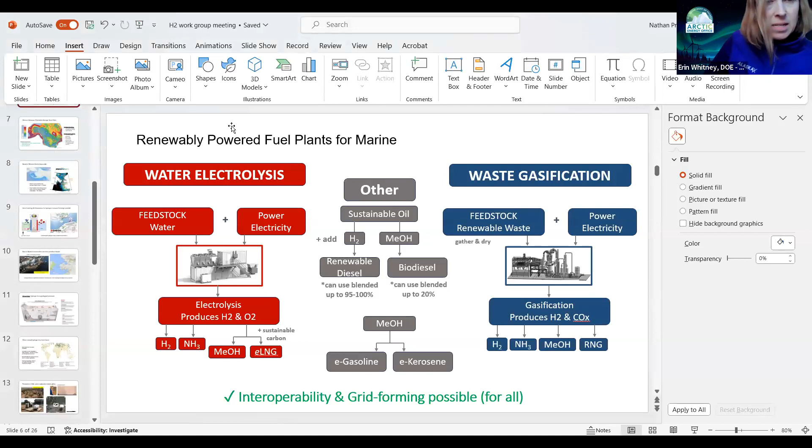Okay. Well, then I think we will jump into our featured speaker for today, which is Dr. Nathan Prisco from the Alaska Center for Energy and Power at the University of Alaska Fairbanks. Nathan joined ACEP relatively recently and is a hydrogen specialist, among other things. So his talk today will be focusing on blue and green marine fuel pathways. I think there's probably a few more details encompassed in that title, but Nathan, I'm going to let you take it away and elaborate on your topic from there.

And I am seeing your presenter view. So far, so good. And yep, that looks perfect. Yeah. So thank you for the opportunity to speak today.

It was a bit of a stand-in, so I think that I did include those things that you mentioned, but also a little bit broader in the update. So really today, highlighting use of hydrogen for grid support. This is something Justin referred to, how hydrogen can support greater amounts of renewable installations, some pathways for renewable fuels in Alaska, also potential for using the infrastructure we have in hydrogen.

And I wanted to give just a quick overview of geologic or natural hydrogen, because there's a lot of discussions in the state and projects on carbon storage as well as geothermal. So really highlighting the subterranean opportunities for hydrogen, with an update on Mighty Pipeline, which is a company I formed before joining the university.

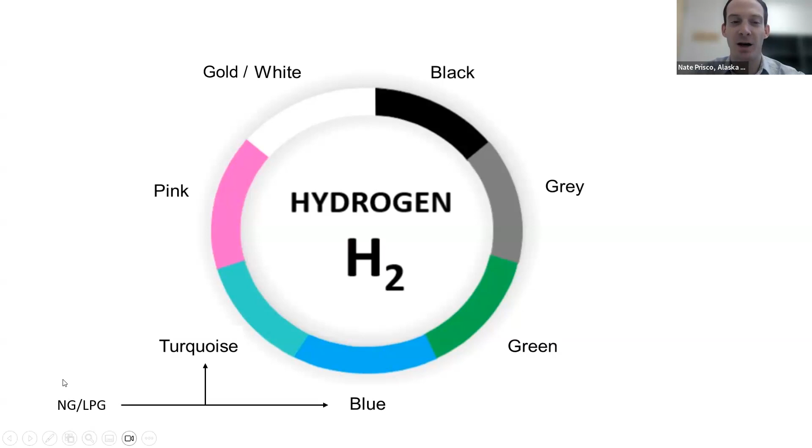One project with ACEP that we've started to look at is really the community value of electrolyzers, particularly in providing grid support. This is something that batteries are quite often used for, but really the challenge is that as conventional power plants are decommissioned, there's very little ability to balance power fluctuations. So there's a lot of interest now in actually using these types of electrolyzer systems for grid support.

And you can really think of this as another form of storage, but also really complementary and an extra layer of protection to batteries. So what makes this grid forming is combining the pieces of an electrolyzer, a fuel cell, a storage tank, and the electronics for providing that grid support. And just to look at the storage capacity, even at a community scale project, a 600 kilogram hydrogen tank is about $400,000 and stores 20 megawatt hours thermal or 8 to 12 electric.

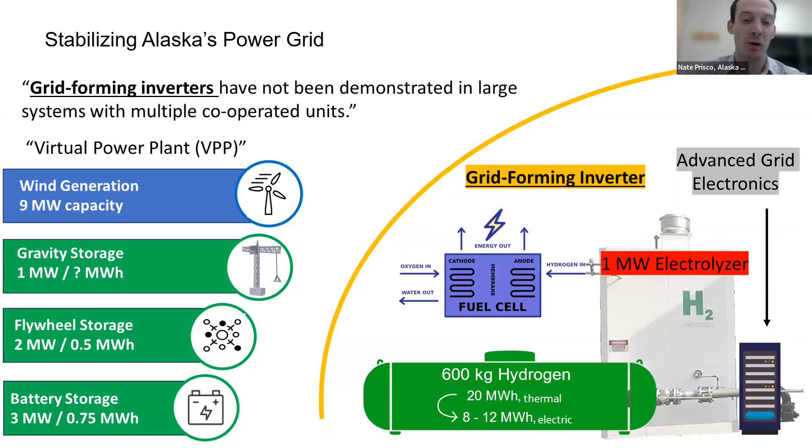So really there's been a lot of DOE FOAs on how can we combine things like electrolyzers, e-fuel plants, or other industrial loads with the grid in smart and sophisticated ways to be able to support more renewable installation.

Really, for opportunities in Alaska for hydrogen, one thing that really comes up a lot is the options for the marine fuel space. This is something driven by regulation that Alaska's cruise ship industry, as well as fish processors and other marine industry, is really trying to figure out: how to source or produce the fuels that they're going to need in Alaska, and just really to try to organize some of the options we have.

We can really get there with renewable power and water to energy, or renewable power and waste to energy. Both of these have been modularized, so it often makes sense to go where the resources are rather than try to develop in existing places. But essentially through electrolysis, you have options to make hydrogen, ammonia, methanol, or even resources like LNG.

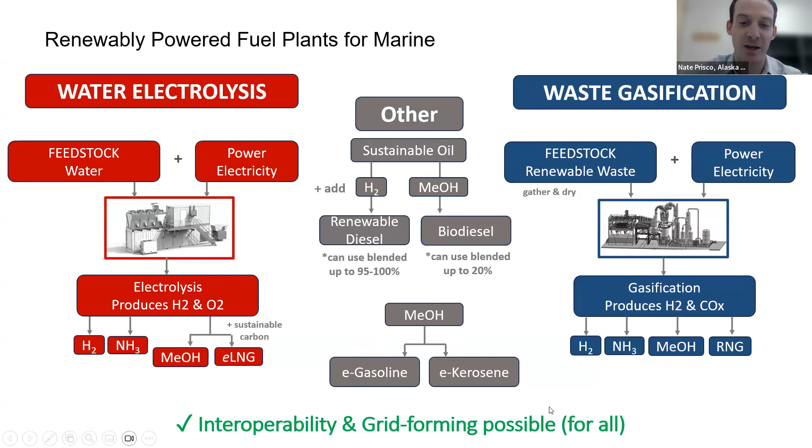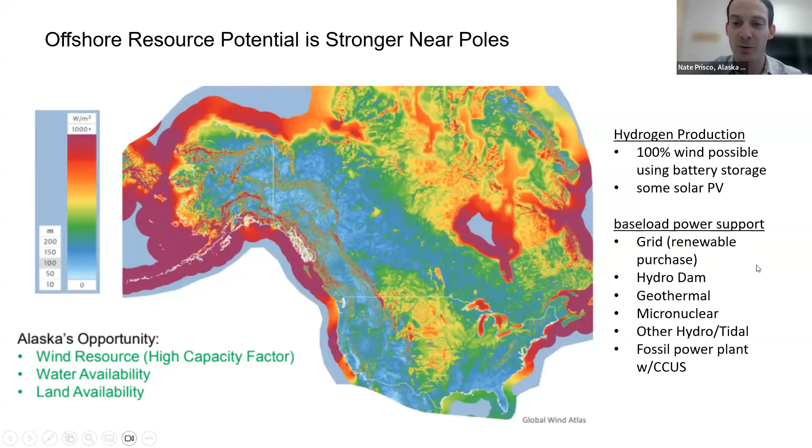And I think a big opportunity for these types of projects is that they can provide grid support, similar in ways to power plants. We've had previous presentations on wind resource potential, but again, just to highlight, Alaska has a very strong wind resource, and offshore resources, including wind, are generally stronger near the poles. So there's definitely wind resource available, there's water availability, land availability, and really the challenge for projects is, of course you can rely exclusively on wind, but what are other ways you can help provide consistency to the electrolyzer?

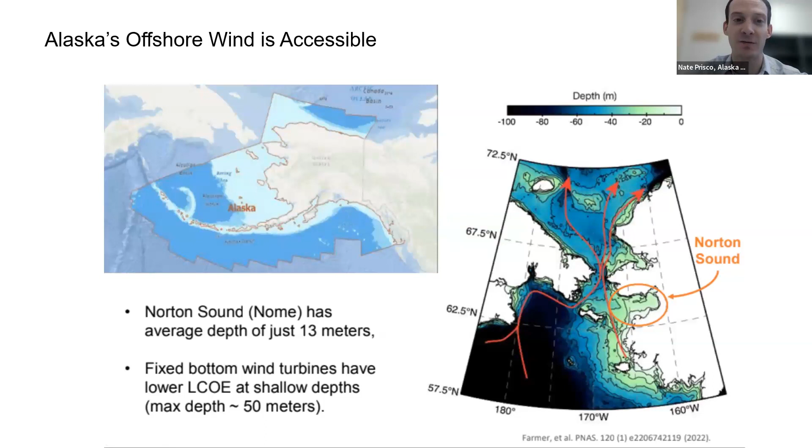Also, in terms of offshore, Alaska's offshore resource is very accessible. Many states, including Texas, are starting to look at offshore leases. And just to really highlight that, part of the reason why Alaska has such a strong potential is this shallow continental shelf, which can be a big cost influence on wind projects.

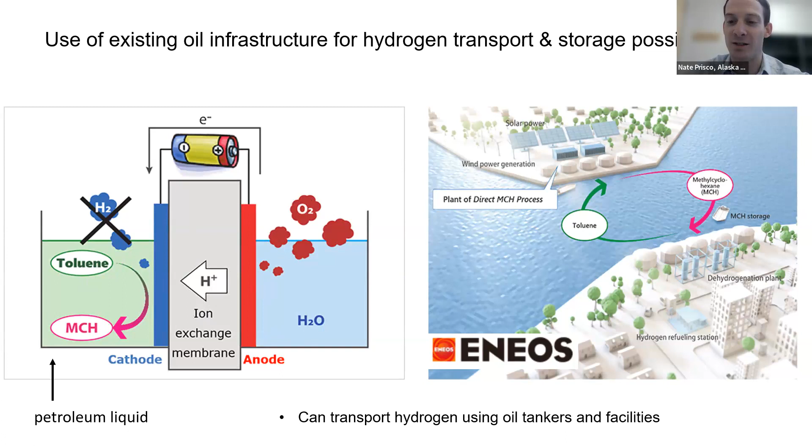One technology that I became aware of recently that I found interesting is ENEOS. So ENEOS is Japan's largest oil refiner, and they're developing projects in Australia and Texas using an electrolysis technology called direct MCH. So in their electrolyzer, they're using MCH, which is essentially a petroleum liquid, and they're able to produce renewable hydrogen and absorb it into this liquid, and this allows them to transport the hydrogen using their existing oil tankers, as well as storing it in existing oil tanks.

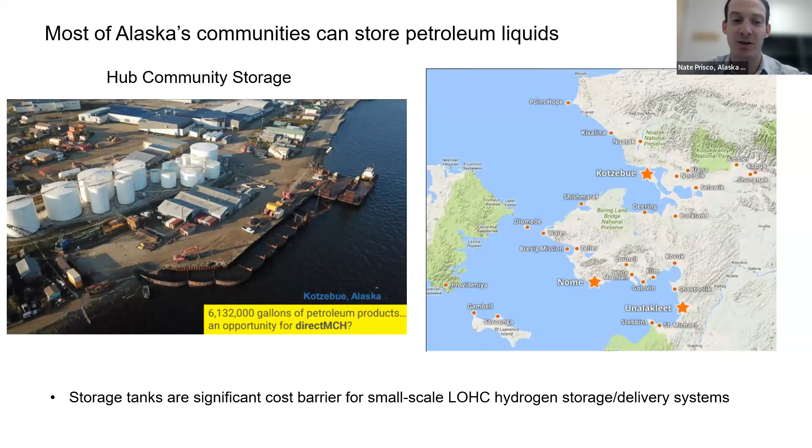And so really one thought that comes to mind is thinking about the challenge of hydrogen distribution in Alaska. We know that many of Alaska's communities have this infrastructure for storing petroleum liquids. So even from pilot scale projects, and thinking about how we can distribute renewable fuels through Alaska from hub communities to other locations, being able to use this existing infrastructure is a really strong value there. And really one of the major barriers to these types of storage and delivery systems is the tanks that you need for these materials.

I also wanted to, on a different note, go back to the subterranean. I haven't heard a lot of talk in Alaska about natural hydrogen, but hydrogen is produced underground in geological processes in a number of ways. So it really depends on what those geologic features are. It can be splitting of water by rocks that have radioactive minerals, or iron-rich rocks. And this hydrogen generally evolves to the surface, but in some cases can be trapped in reservoirs underground.

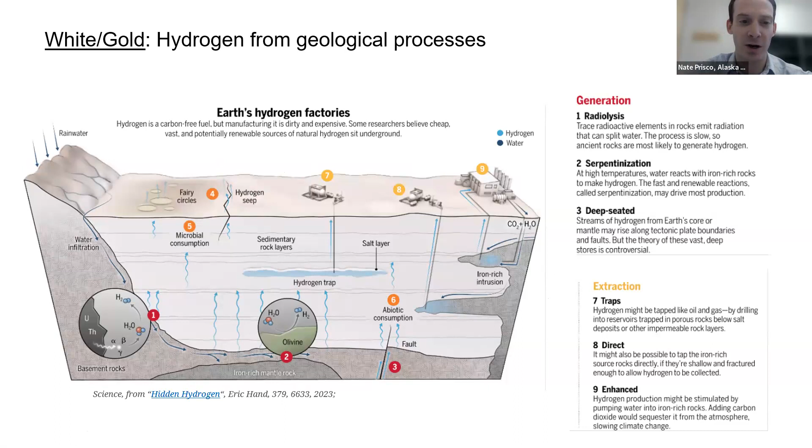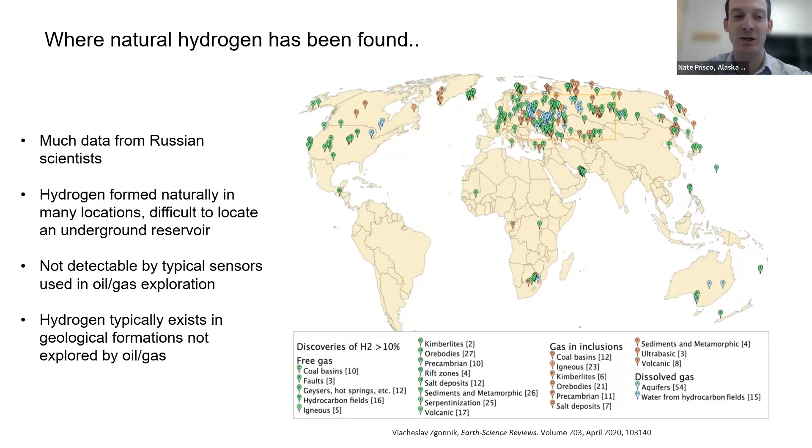And so part of why this is a frontier effort is that it involves exploring geological formations that typically haven't been explored by oil and gas. And just as a notable example, in Mali, there was a company that was drilling a water well. They struck hydrogen, and there's a community that has been powered on hydrogen, carbon-free, there. And there's active exploration efforts throughout the world at this point.

And what's interesting is oftentimes you can see evidence of hydrogen seeps at the surface with what's called fairy circles. So this hydrogen seeping to the surface can change plant growth. It can cause depressions or mounds to form. And often, if you go on Google Earth, you can see them in Namibia, you can see them in North Carolina and other places.

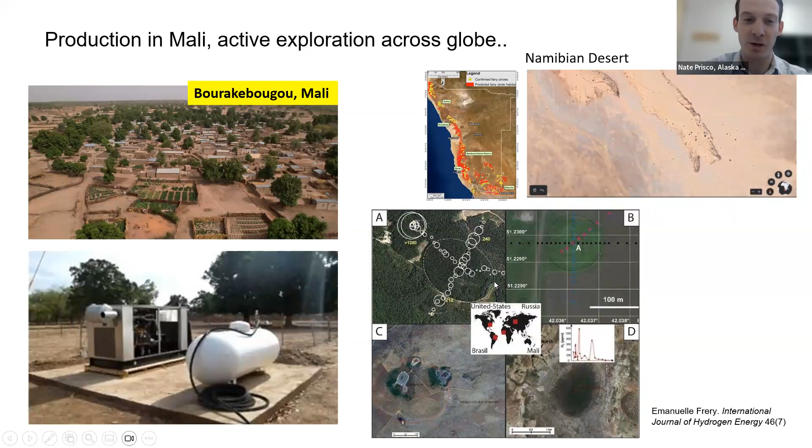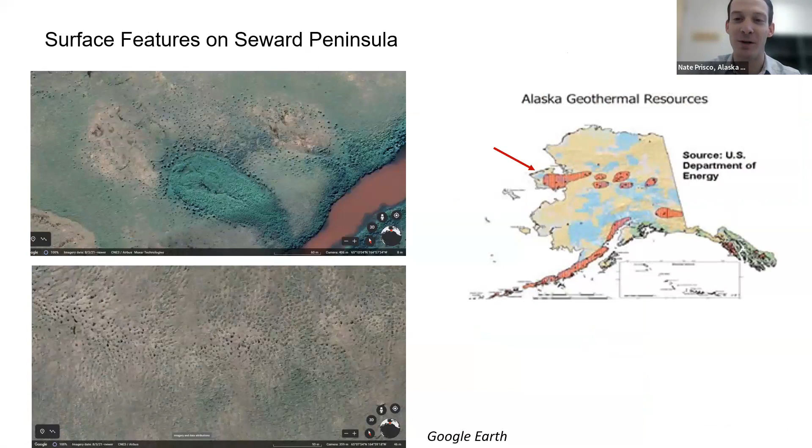And then I would just want to point out, ACEP is working on geothermal projects at Pilgrim. And one thing to point out is that there at least seem to be similar types of surface features there. And while I don't have a natural hydrogen company, if I did, I'd look at Seward Peninsula.

And to end the talk, I wanted to give an overview of Mighty Pipeline, which is a hydrogen transport and distribution company that really brought me to Alaska, and I have continued to work on it as I can. But really the goal of Mighty Pipeline is to be able to distribute hydrogen through existing oil and gas infrastructure, really addressing the problem that hydrogen is something that many people are trying to produce. But one of the major barriers is how do we transport and store hydrogen?

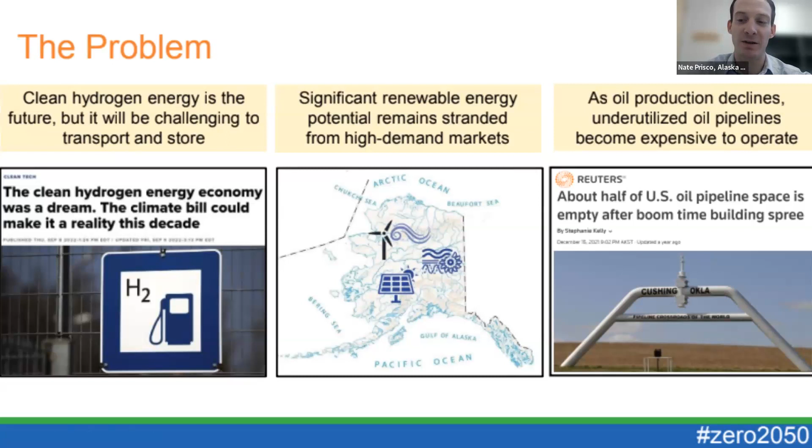Also, looking at the opportunities in Alaska, we see that we have very large amounts of renewable potential, but oftentimes lack that transmission interconnect to bring them to markets. And also recognizing the challenge that as oil production is declining, pipelines become expensive to operate. So the approach with Mighty Pipeline is developing hardware and process technology to transport hydrogen in the form of ammonia through oil pipelines for bulk delivery to market.

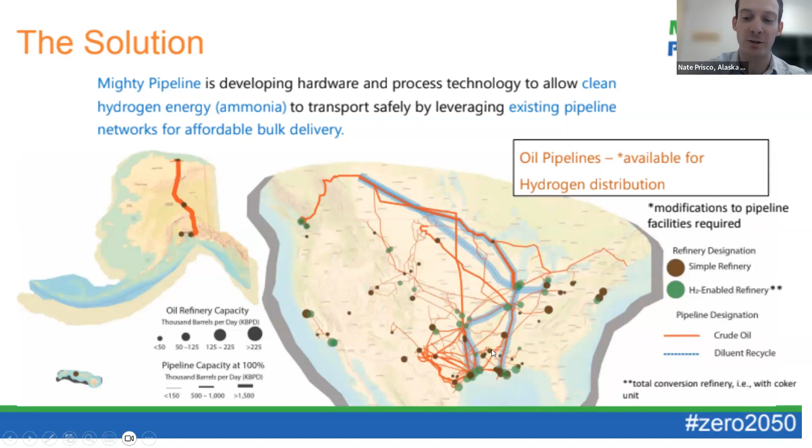Looking at the U.S. pipeline network, Alaska has the second largest oil pipeline in the world. And I've highlighted refineries in the United States to be either brown, as simple refineries, which are only capable of distillation, or H2 enabled refineries. These are complex refineries that have units like delayed cokers and other equipment. And essentially, this is where the vast majority of hydrogen is produced and used in the United States today. So there are definitely advantages to being able to distribute hydrogen to these locations, especially in the Gulf, where there are already hydrogen pipelines that can distribute that.

So really, the focus is on the midstream piece, because there's going to be substantial amounts of investment needed, and oftentimes midstream isn't a big focus. And in many cases, ammonia can be the most economical carrier whenever you have long distances of transport, as well as long storage times. So really, the problem that we solved is that Mighty Solution is a patent pending process technology to blend ammonia and oil stably so that it can be transported through pipes. And this enhances pipeline ROI and throughput.

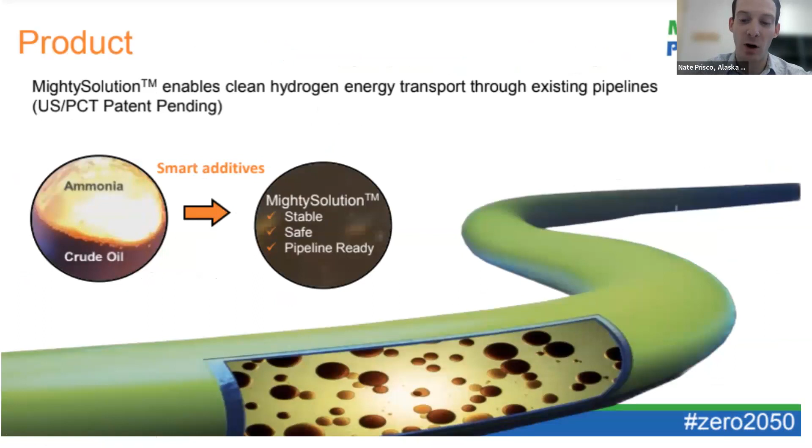So really the opportunity, looking at the benefits of ammonia blending into oil pipelines and what this can do, is that a lot of more viscous crude oils are very difficult to transport. In fact, very environmentally intensive to transport. So in the case of Canada, their oil cannot actually go through pipelines by itself. So they import oil from the United States to blend with their oil to send back to us so that we can reprocess it in refineries and send it back to them.

So this adds a lot of cost to their industry, and being able to produce a renewable or carbon-free alternative to that can reduce that $10 per barrel diluent recycle, but also in terms of those pipelines, essentially 70% of the pipeline is what they're trying to transport, and 30% is the diluent they're using to be able to move that.

So Alaska has not had a sort of strategy like this in the past, because there is no diluent market in Alaska, but using clean ammonia as a diluent could certainly help with the resources in our state. And also in terms of bio opportunities, one of the hardest parts of bioenergy is gathering. So being able to use pipelines and transport difficult to move bioresources is a major benefit.

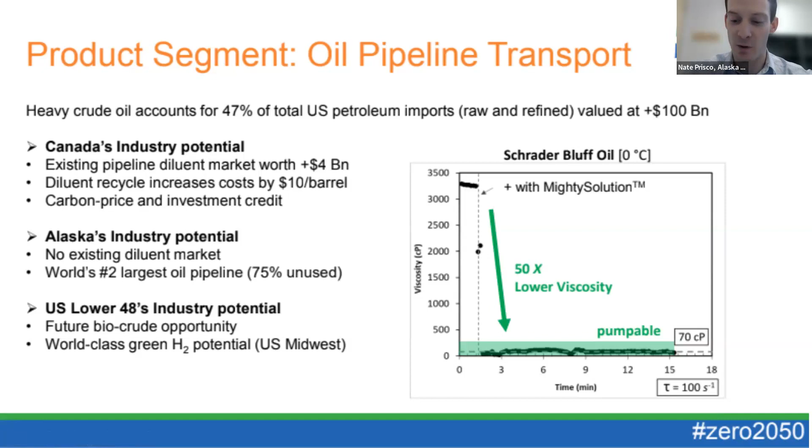So essentially what this does is that we can substantially reduce viscosity and transport any oil through a pipeline, whether or not that pipeline was designed for light oils or other resources. So really as an overview, this allows for transport of oil and ammonia. They can be separated at the terminal using just gravity, so very low carbon intensity. There's benefits in terms of what this can do in terms of oil processing.

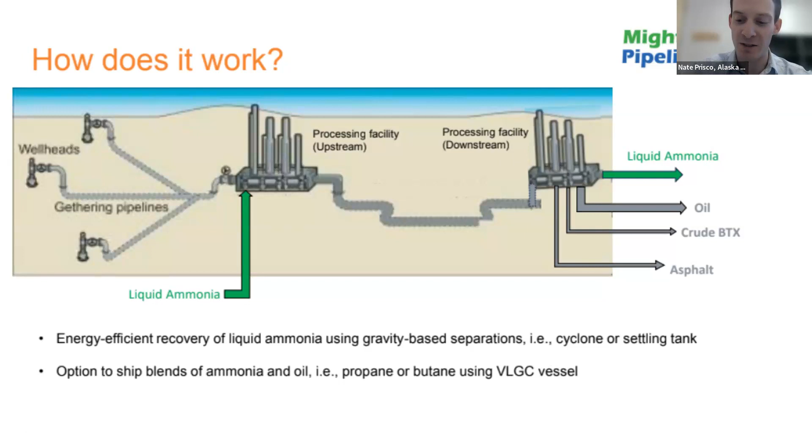So essentially, you can upgrade crude oil value and get things that can be used like INEOS does. So BTX can be used as hydrogen transporters. You can remove things like asphalt. And really, there's companies in Japan that are also interested in shipping blends of ammonia, because ammonia weighs about the same as propane and butane. So using these existing gas carriers, you can transport blends of ammonia and fuels.

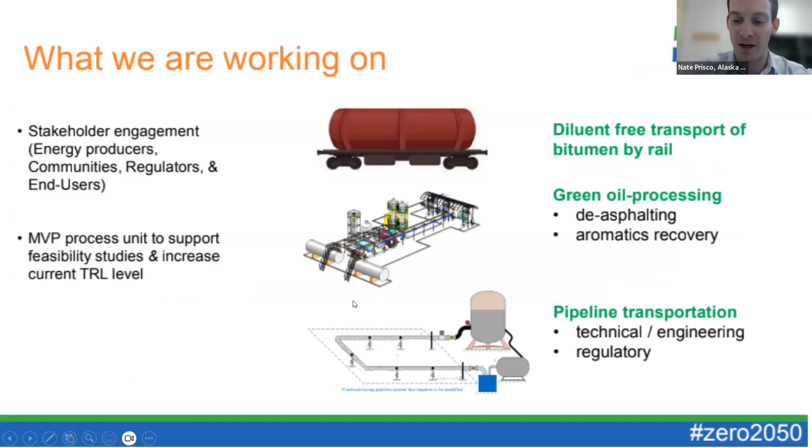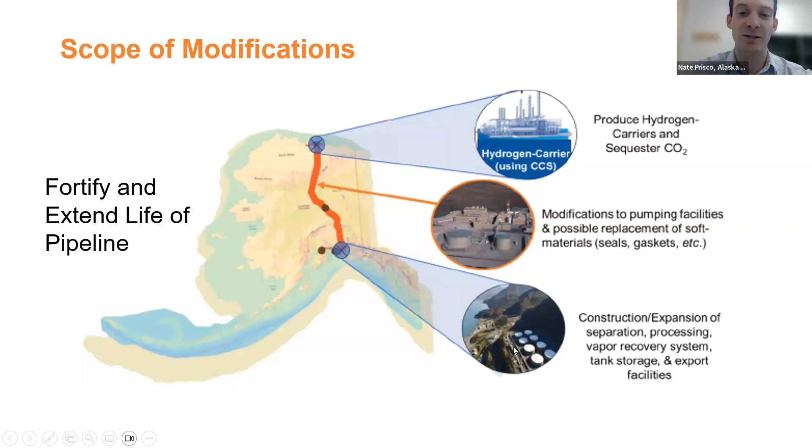So ultimately, we're looking at demonstrating the transport of bitumen by rail, the recovery or the value enhancing of oil processing in a green way, as well as working towards validating those pipeline applications. And essentially, as an overview, it does involve some scope of modification to be able to transport resources like this and hydrogen carriers like ammonia, various modifications to pumping facilities, as well as your storage and recovery facilities.

But I will point out that very similar projects have been proposed in the past. So in 1988, there was the prospective Prudhoe Bay LPG project. This was envisioned as an end-of-life recovery. And so they were looking at recovering the LPG of the North Slope, and they were going to do this by modifying the pipeline in a similar way that I just introduced. And ultimately, what they decided is that those resources were better used to enhance oil production, but the benefits of that decision are entering diminishing returns.

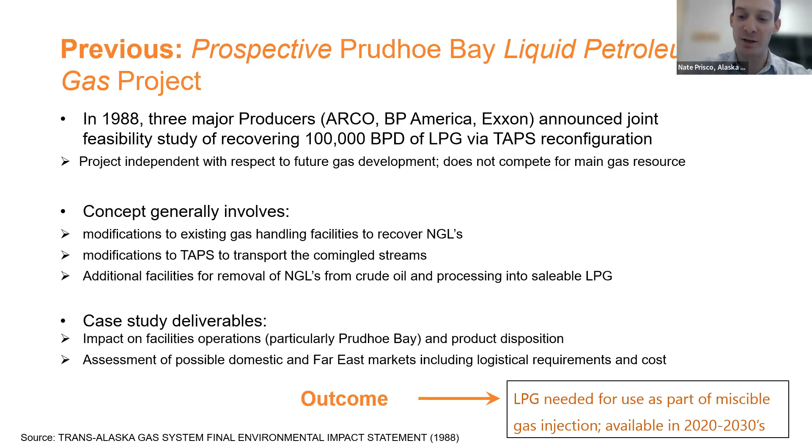And so looking into the future, there are opportunities to recover things like LPG from the North Slope, and for clean hydrogen pathways like blue hydrogen or turquoise hydrogen, LPG can be used as your feedstock to produce a low emission hydrogen. In some cases, turquoise hydrogen can be lower or equal to that from electrolysis. You can certainly reach out if you want to learn more about this comparison, but ultimately it can be competitive with other sources and other places that are looking at producing blue ammonia as a resource.

So ultimately, what I'm trying to highlight is that the challenge in Alaska is that projects are going to be very capital intensive, but maybe considering it's a stranded resource, there's less of a feedstock burden. But ultimately, you need some sort of mutual benefit that can be monetized to support this. So there's tax credits for low carbon resources, but ultimately, this would have to be motivated by, as the throughput is declining, the ability to really reduce the burden on the pipeline operator, who has to try to keep that pipeline maintained with low throughput, as well as the ability to move LPG.

And then, just in a long-term perspective, once those investments are paid off, Alaska's cash cost is very competitive to other regions. And definitely would be interested in any questions.